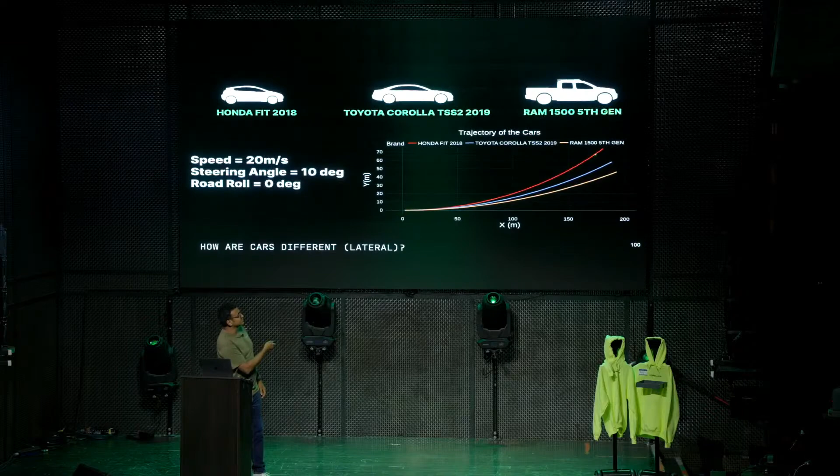So this is the trajectory that these cars would take. So this is the y versus x. So if you start at the same position, this is what the cars would do under the same instructions. So I guess right now it's clear that we need to really understand what exactly happens when you give instructions to cars. So how do we actually learn these things? We learn these things using something called the vehicle model. So to understand the vehicle model, let's look at some high school physics.

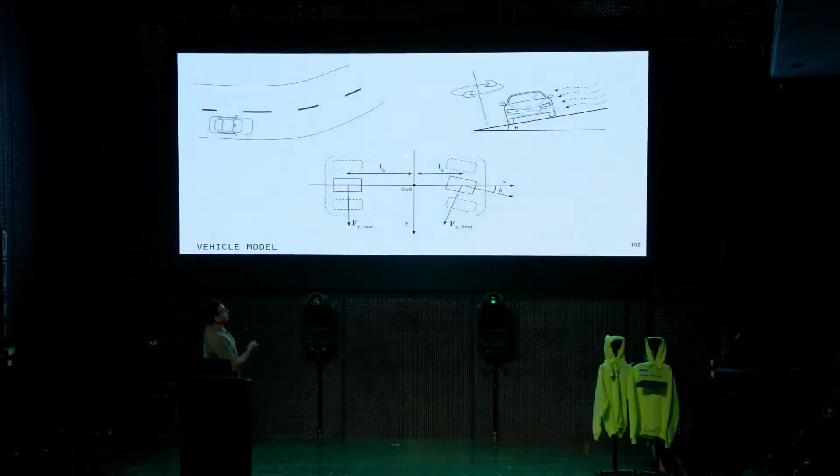So you're in a car and you're about to go into a turn. So this is the front view. So let's assume that the road is banked, and let's also assume there is some wind, because why not? So this is the top view of your car. So your four wheels and your front wheels are turning. I don't know how many of you are familiar with car dynamics. So this is something that we call a slip angle. The angle between your direction of motion and your heading is called the slip angle, and that determines a lot of the dynamics of your car.

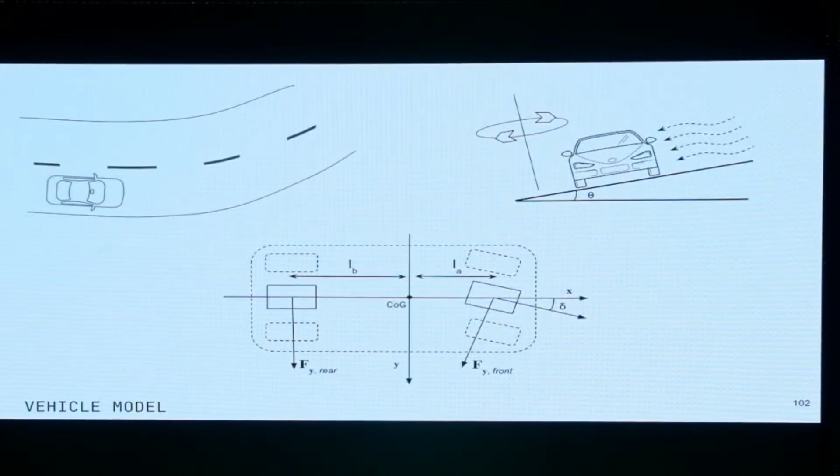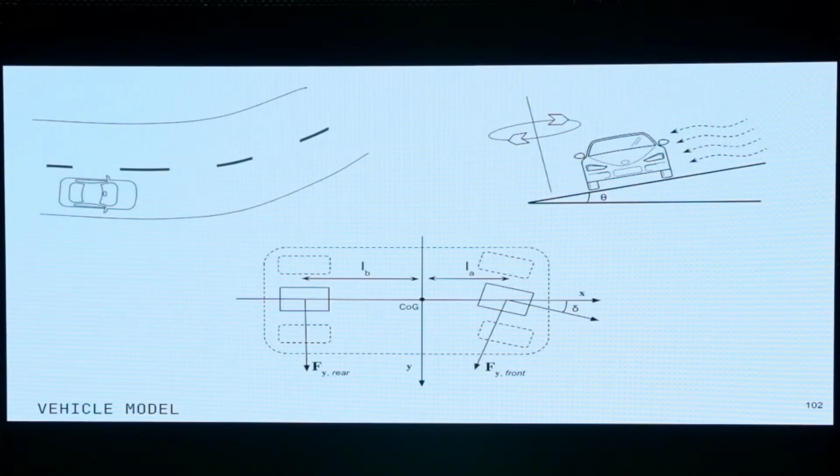So you can see that there are forces that act on the tires. So this is basically something called a bicycle model, which is you assume that your car is a bicycle, which is not a great assumption, but it really works. It's a simplified assumption of your car. And then this is where the center of gravity is, and then if you draw the free body diagram and the forces that act on this object, you end up with something like this.

So let's quickly go through this. It looks quite scary, but it's not. So what we have is the desired curvature that we get from the model and from the planner. We know the car has to do something, right, at some curvature, at some speed. So we have the yaw rate.

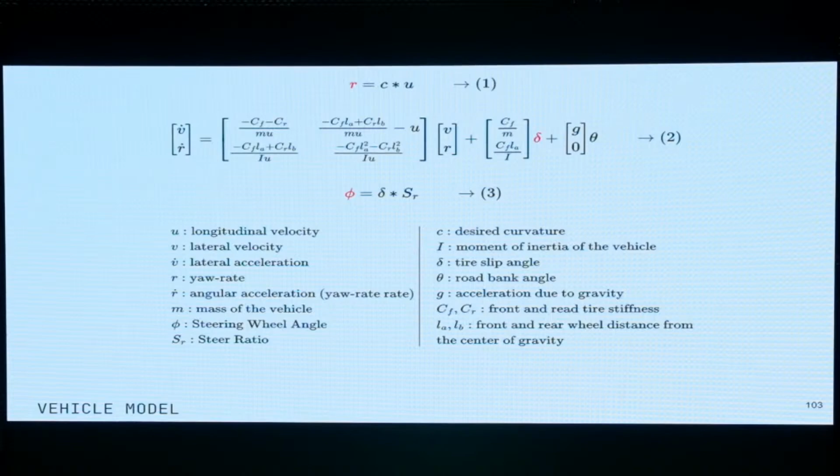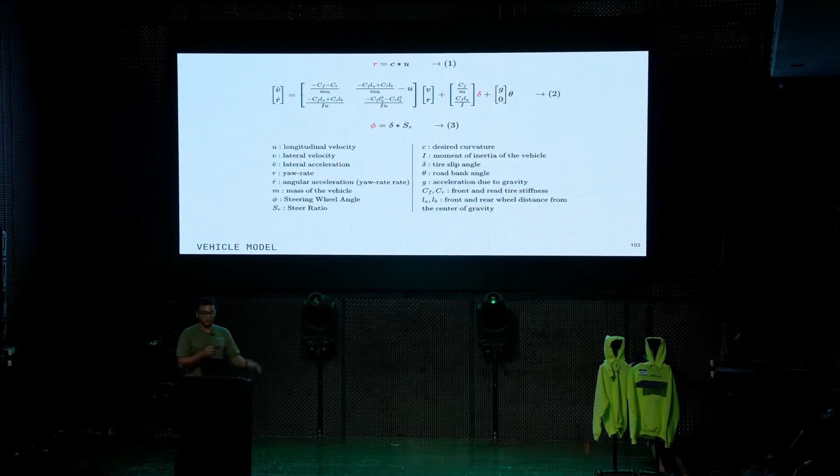If we make some very generous assumptions about cars and about our dynamics, we can find from the state space equation what the slip angle is to achieve this particular yaw rate. And when we know the slip angle, we can find the steering angle that you're required to turn to achieve the maneuver that you want to do. So this is called the vehicle model.

So we have a daemon in openpilot called paramsd, which learns all these parameters that we spoke about, and then it learns the dynamics of your particular car. So it learns things like the steer ratio, the tire stiffness, the road roll, the steering angle offsets, and all of these things. And it learns all of these things about your particular car.

So the interesting thing is the steering angle offsets. To go straight, you would assume you should keep your steering angle at 0 degrees. But that's not true. All cars have some offset. You have to keep your steering angle at like 2 degrees or minus 2 degrees or whatever. And that depends on your car and how long you've driven it and stuff like that. So this is also something that we learn live while you're driving.

A fun fact is that as a consequence of learning all this, we also know when you have a bad wheel alignment, which is if your wheels are aligned badly, and you want to go straight, you have to hold your wheel at like a 10-degree angle or something like that. A lot of people come on Discord and they're like, hey, I just installed openpilot. It drives fine, but when the wheel is straight, it tries to go right, and when it's going straight, the wheel is slightly to the right.

Is my device broken? And then we tell them what the problem is, and they come back a few days later saying, hey, about that, I went to a mechanic and he said my wheel alignments were wrong, and then they fixed it, and now my car drives perfectly. So this is something that, from your logs and from the tolerances that we know, we can tell you if your car has a bad wheel alignment.

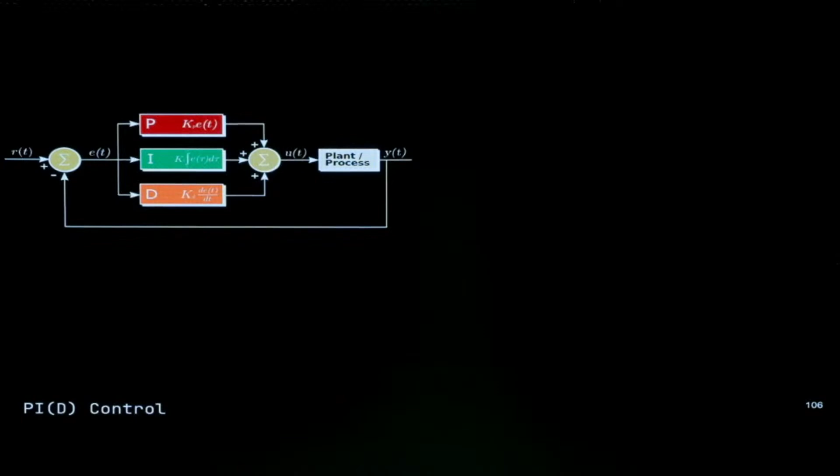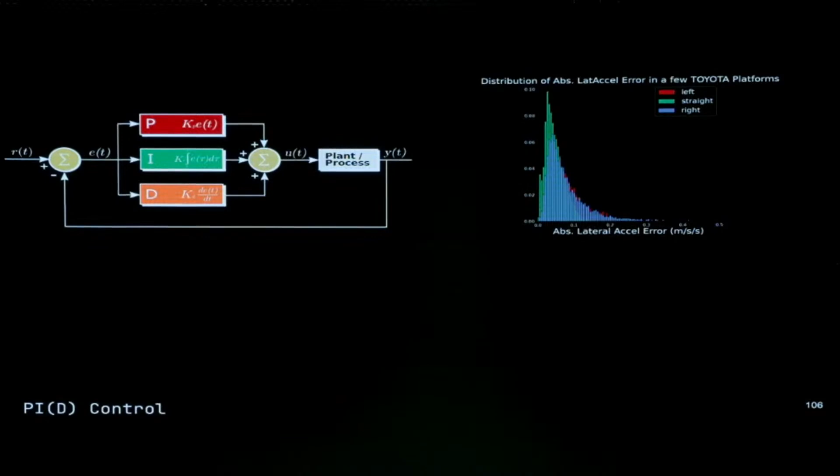So this is the distribution of the lateral acceleration error when you're doing these maneuvers. It's very important for us to understand how well the car is performing the maneuvers that you're asking it to do. And for that, we have a whole bunch of metrics. But one of the most important is absolute lateral acceleration error. So what do we mean by this?

We mean that when the instruction is to perform some maneuver with some lateral acceleration, and the car is doing something else, what's the difference between these two? And we have to drive this number down. So as you can see, the average of the distribution is much lower than in turns, which means that while going straight, it's pretty much error-free, but in turns, it's slightly worse. So this is a metric. Just remember this metric. We'll keep coming back to this again and again. So we had all of this, right?

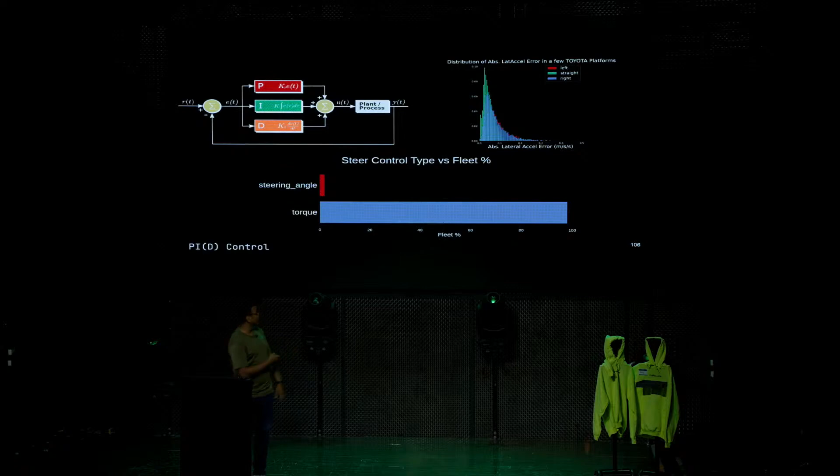But then we realized that in our fleet, the way we actually give instructions to cars, we don't actually give the steering angle. For overwhelmingly most of our cars, we give the torque. We give the steering torque that you have to apply to the car.

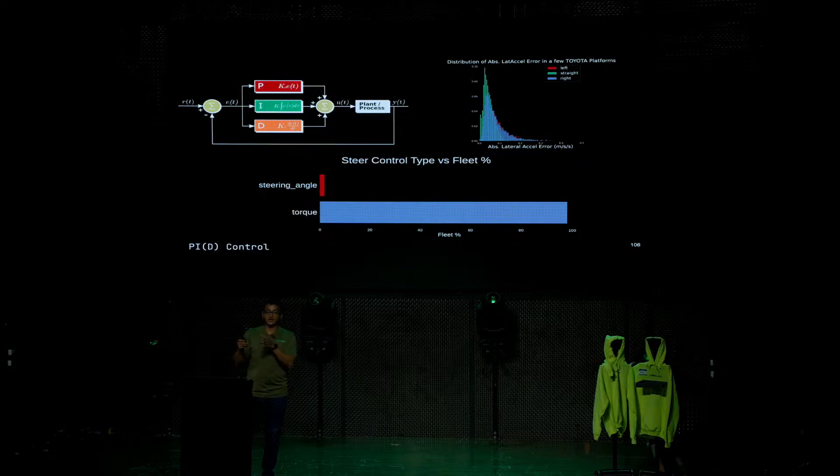So we realized, wait a minute, we were going about this whole roundabout way of: we have the curvature, we do all of these equations, we find the steering angle, then we close the loop on the steering angle, and then finally send torque. So we can just circumvent that and try to find torque. This was a whole effort called torque control, which we released in 0.8.15.

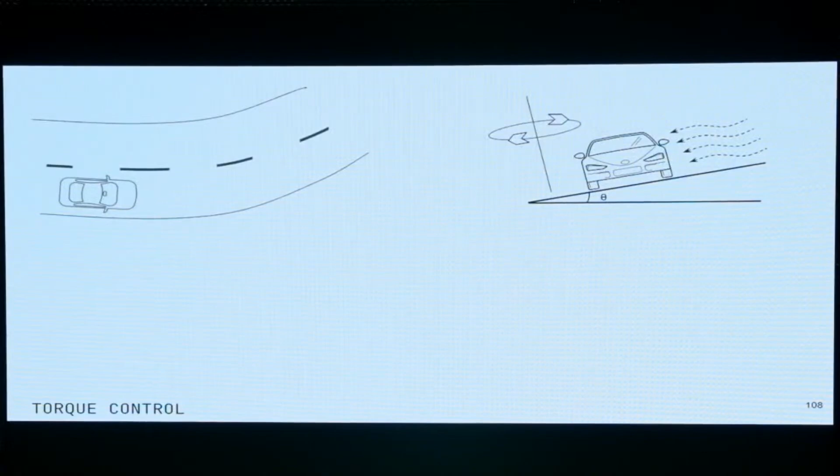So let's revisit the same maneuver that we did earlier, which is this car doing this turn at this angle. Now if you focus on the tire patch that is in contact with the road, this is the free body diagram of this tire patch. You can see these are the forces that develop on your tire during a turn. The wheel heading is this, the wheel is moving here. So this is the slip angle.

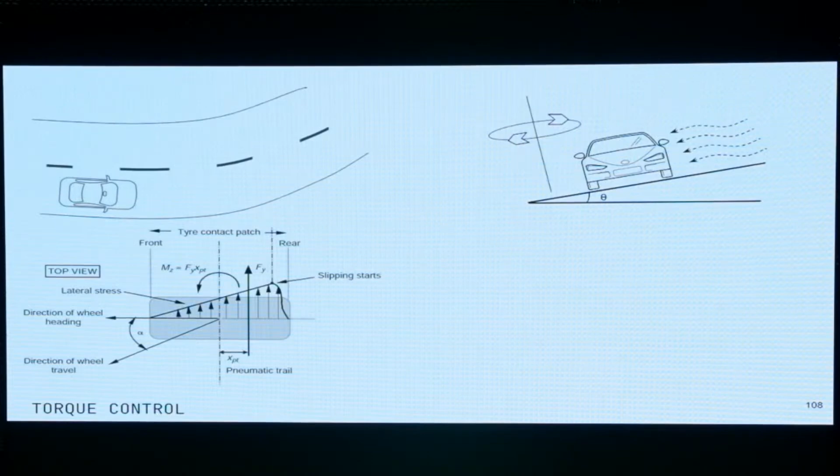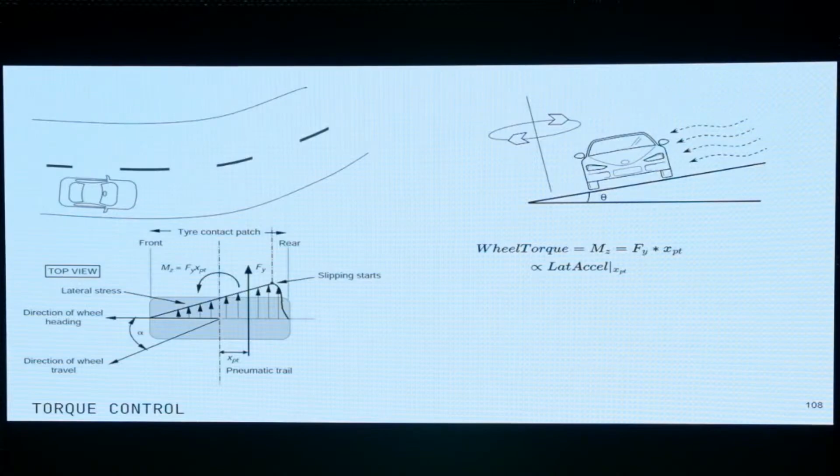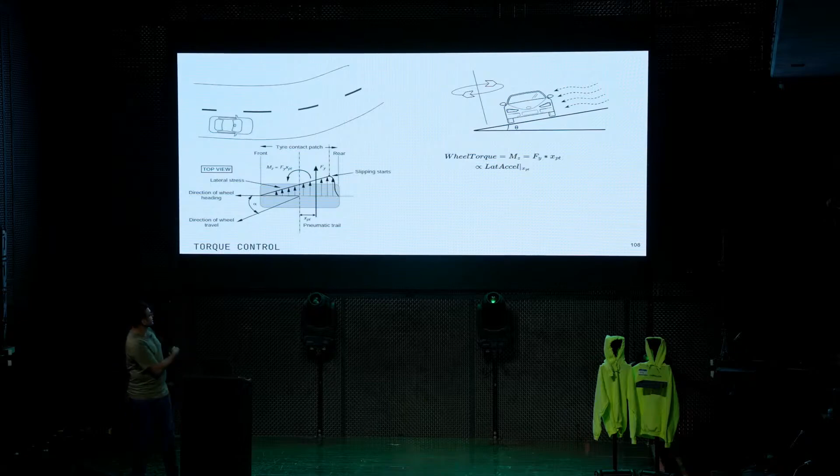So what this effectively says is that you have a resultant force that is X behind the center of the wheel. So basically, the wheel torque is this resultant force F times this pneumatic trail. And for a particular configuration of your vehicle, this is constant. So the key insight here was that the wheel torque is proportional to the lateral acceleration that you want to achieve, adjusting for gravity.

And from data, the second insight was that the wheel torque is directly proportional to the steering torque that you apply when you account for some friction. And friction is, when you're turning right and immediately want to turn left, there is a bit of friction in your steering column that you have to account for. So basically, we have a lateral acceleration that we want to achieve, and all we need to do is learn one proportionality factor to know what command to send to the car. This was great news. So we can find one value for each platform, and everything is good.

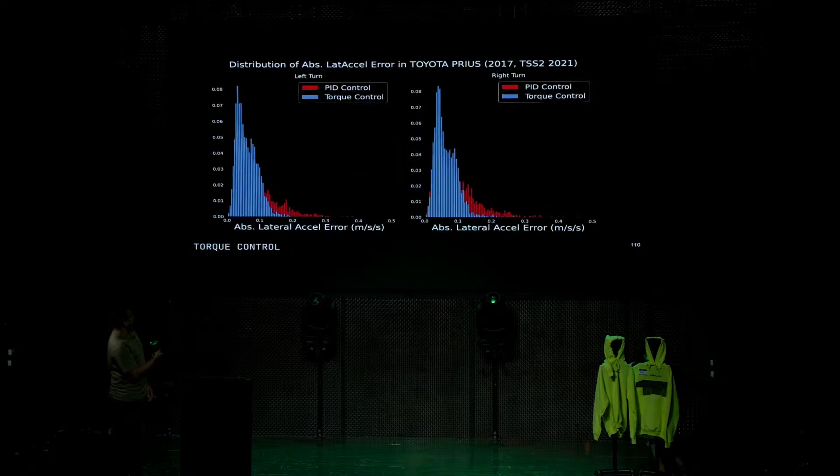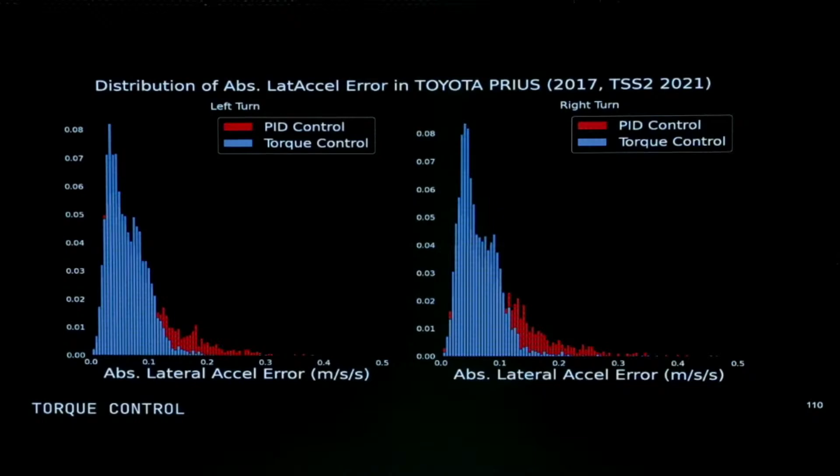So this was great news. And this is even better because the subtlety is that these higher errors lead to other things that are undesirable, like more ping-ponging, wandering in the lane, and other things like that, which we don't want. So this was great news, and everything looks good here. But then, okay, let's revisit the assumptions that we made.

The assumption was the pneumatic trail was constant for a given vertical load, which means for a given configuration of your car. But even among platforms, even among Toyota Priuses, each Toyota Prius is slightly different depending on how long you've used it, what you put in your car, and stuff like that. The contact tire patch is also quite different. It depends on the quality of your wheels, how much air you have in your wheels, and which road conditions you're driving on. And the steering column friction depends on the wear and tear of your car, etc.

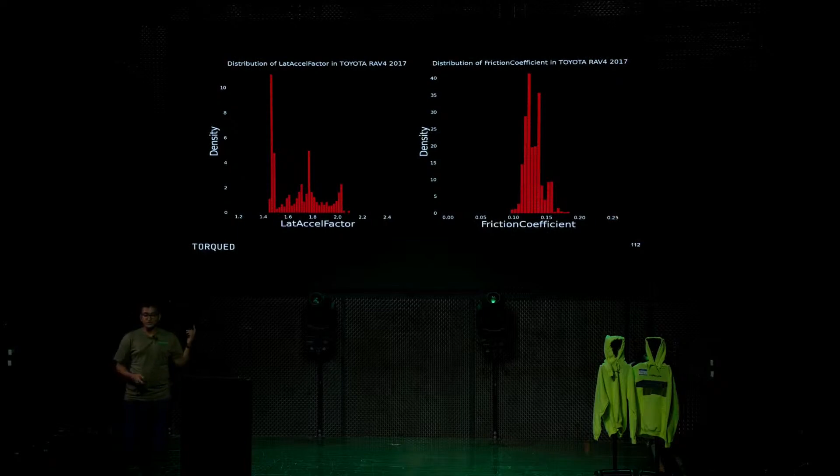This is also corroborated by the fact that when we do the same calculation to find the single factor for each platform on every car of that platform, we see a big distribution in the value that is learned. So this is the distribution of the factor that I spoke about. And you can see that even for one platform, there is a wide range of values. So we set the value somewhere here in between, and then it's great for people whose cars are here.

But then if people's cars are like here or here, it's not that great. So this was the motivation for us to go down this route of, we're not happy with platform averages. We want something tuned for your specific car, the car that you drive. So this inspired this effort called torqued, which is auto-tune.

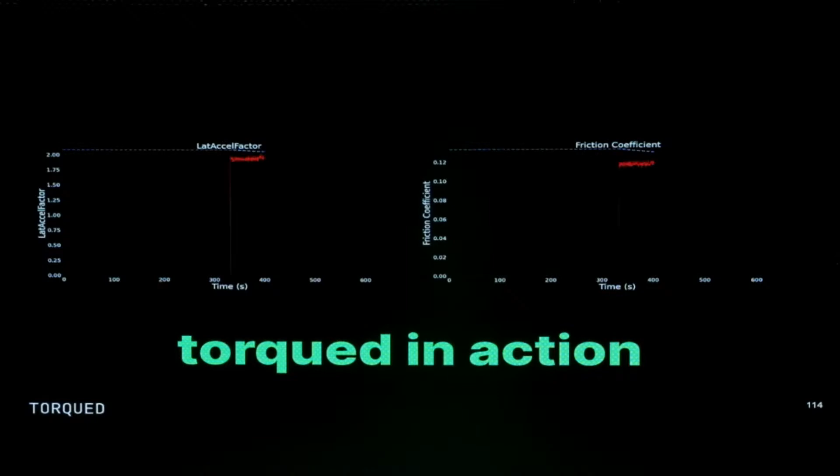So basically what it does is the same thing that we were doing offline on all the data from a particular platform like the RAV4. Now we do the same computation on your device while you're driving. So when you start driving, we collect data, and then once it meets certain conditions, we use the algorithm that we were doing offline in your car, and now we have one constant that is learned on your car.

And the great thing about it is that if you change your tires next week, or if you refill air, or if you put some stuff on top of your car to go somewhere, it learns live and it adapts live, and your performance becomes better as a result of that, which is great.

So going back to the same metric, this is for Toyota Highlanders. You can see that the torque control was red, which was already an improvement over the previous generation stuff. But torqued was an even better improvement over that. This means that if your platform has a bunch of versions that are different but somehow called the same platform, it's still fine, because we learn it for your particular car.

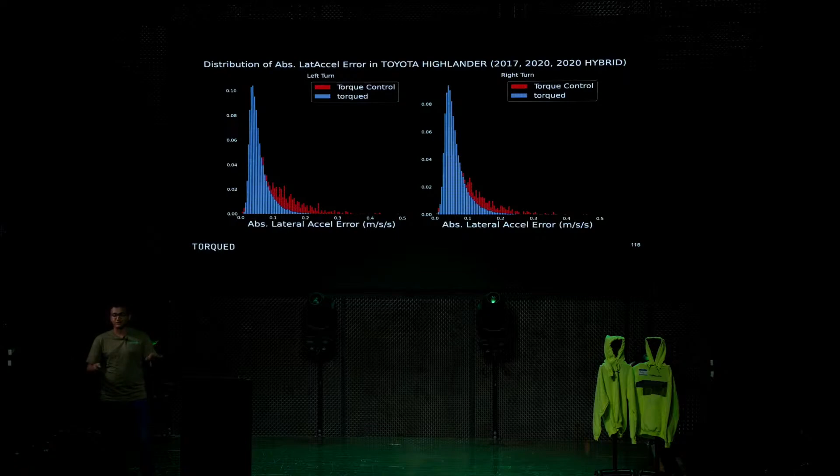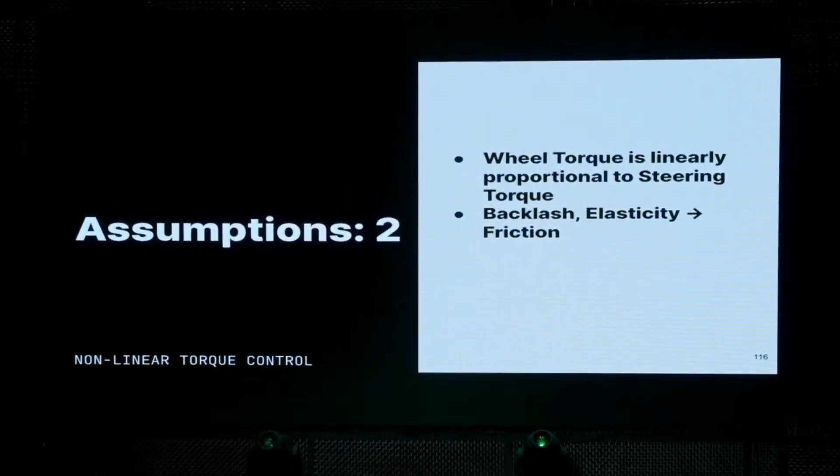So let's revisit the assumption again. We assume that the wheel torque is linearly proportional to the steering torque. So you apply some steering torque, the wheel torque is some factor of that, and then we forgot about it. But it turns out that's also not true. There are effects like backlash. When you're turning left and immediately have to turn right, there is some play in the steering column, a backlash that you have to overcome, and then your car starts turning right.

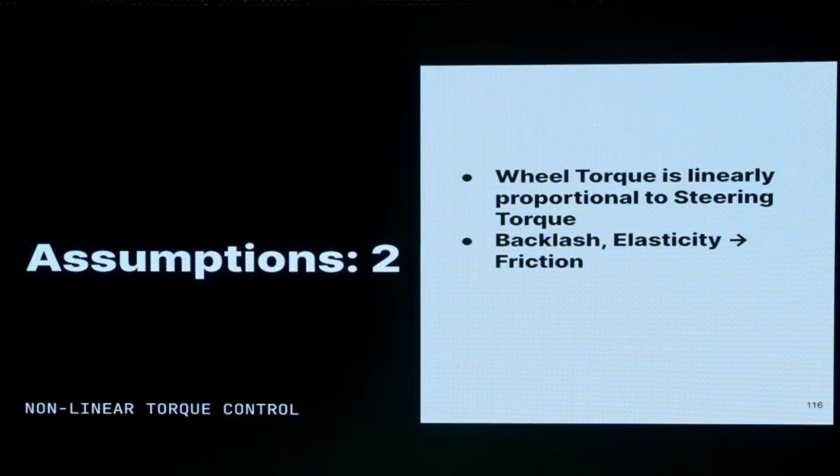While driving, we don't really realize this because humans are really good at driving. But when you're controlling the car through instructions, you realize there are all these effects at play that you have to account for. The other assumption was that we didn't care much about speed. We assumed that everything works the same at all speeds. But it turns out this is also not true. For some platforms, at different speeds, your car behaves very differently, and this also needs to be accounted for.

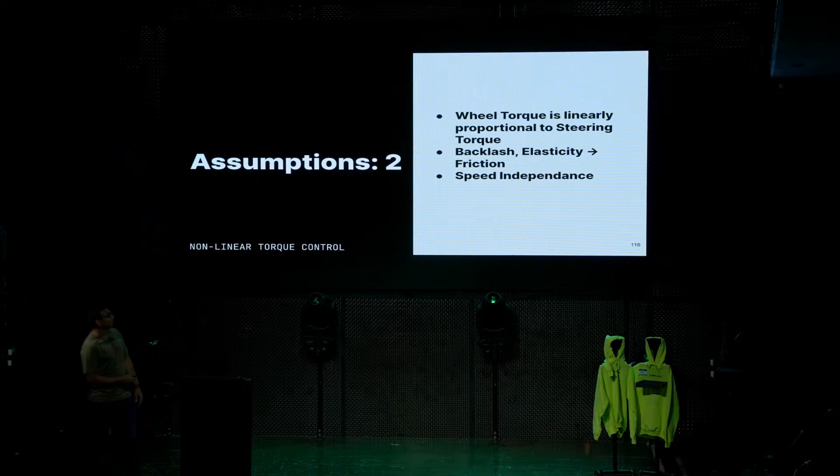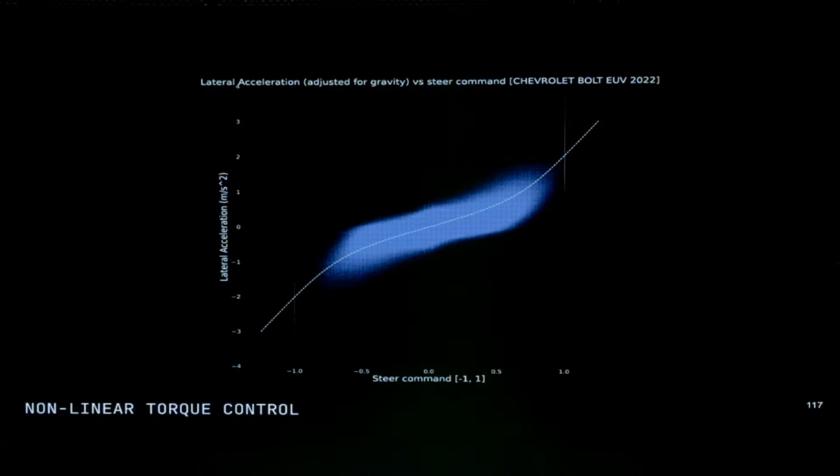So for example, if you take the same plot of the lateral acceleration that we desire versus the steering command that you input, this is for the Chevrolet Bolt. This looks pretty nonlinear to me. If you remember, in the RAV4 it was pretty linear, and in this it's not. So we had to do something about this, because if you apply the same algorithm that we used earlier, people have not nice experiences, especially at the extremes where it gets pretty nonlinear.

So we implemented a nonlinear algorithm where we have a nonlinear fit for the relationship between the lateral acceleration that you want to drive on and the command that you give. This was out in 0.9.3, and you can see the effect of this change. The nonlinear is better than the linear, which is also great.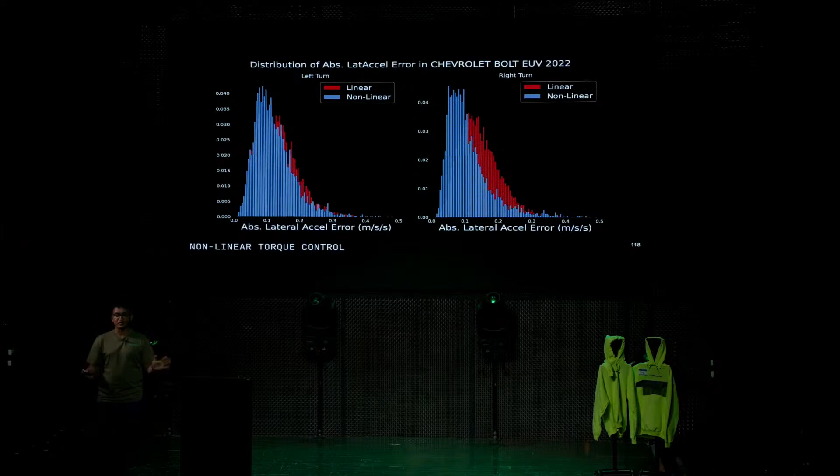And a fun fact is you can see that there is a difference in the left turn and the right turn. This is an idiosyncrasy of GMs. All these are super interesting things because we can see this at scale, and it's very hard to see this if you have one car. The errors are slightly higher for left turns than right turns, because in Chevrolets the left turn is slightly different compared to right turns. I don't know why, but it just is, and this also we need to account for. This was a great improvement for the people who have a Chevrolet Bolt.

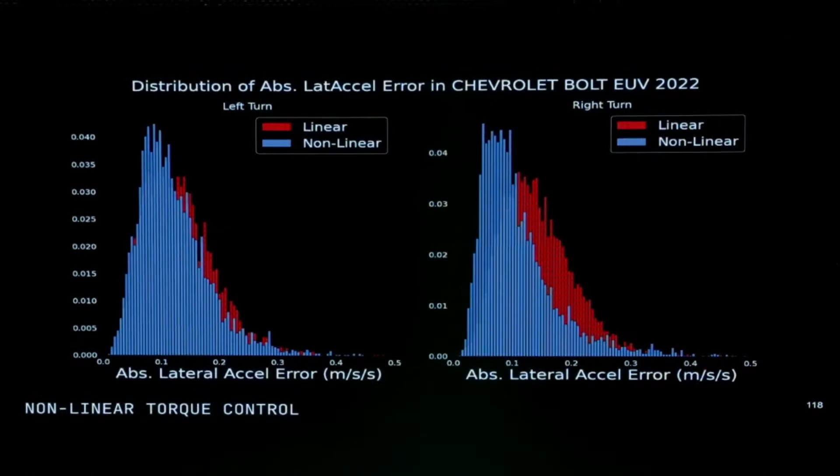So where do we go from this? We've seen that over time we keep improving this stuff.

We keep making sure that we move from fleet averages to platform averages and from platform stuff to each individual car. So a big effort for that was we released this dataset called commaSteeringControl. And this dataset is the largest dataset of its kind. So what it has is the actual command that you give to the car, which is the steer command, and all the other metadata like the lateral acceleration, the road roll, the velocity, a whole bunch of other stuff.

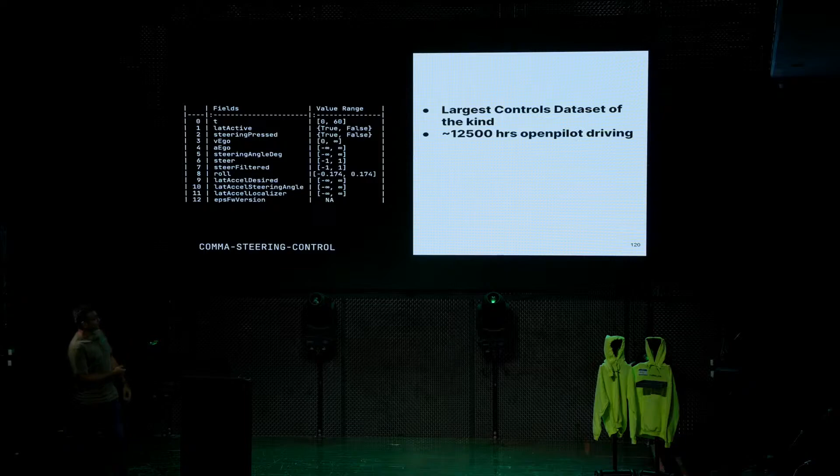Now this is excellent because this data is something that probably nobody else has. We are in a unique position to have so much data about so many different platforms across different driving conditions, different weather conditions and all of that stuff, and different usages. The cars have different wear and tear. So this is a fantastic dataset. This is 12,500 hours of openpilot driving, 10 plus car models and 10 plus brands. And we have plans to add more data to this. We have plans to add non-openpilot driving.

So when I spoke earlier about the vehicle model, that vehicle model is valid for small slip angles, which I mean by small steering on a highway. But if you want to do a rapid 180-degree turn, the vehicle model completely breaks down. You can't use the same vehicle model for that. In openpilot, we are not there yet to do 180-degree turns, but we will be. And at that time, we will have to dive deeper into the data and figure out how we can improve our algorithms to cater to those maneuvers. So this dataset has all of this information.

So some people on Discord have already started using this. They have some obscure brand that not many openpilot users use. So now they have access to a whole lot of data that they can dive into, and they can see if they can improve the performance of their own particular car, which is great.

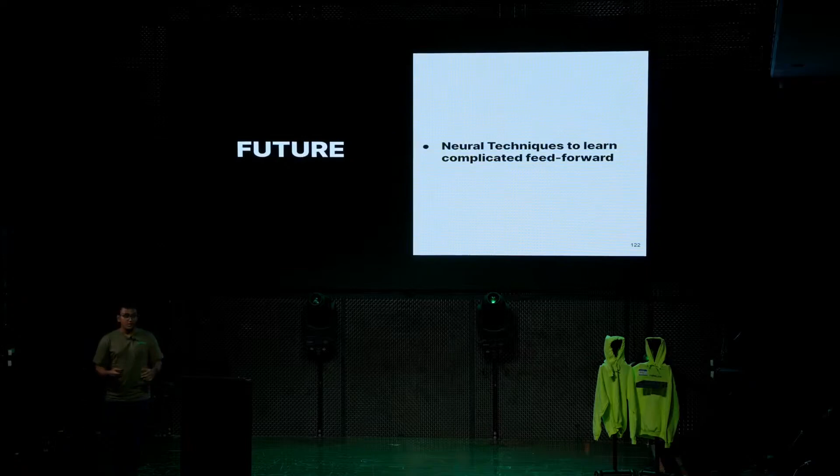So what is the future for tuning and controls, right? We want to use more neural techniques to learn the complicated feed-forward functions. So you saw we started with a simple linear model, and then we went to a linear model on device, and then we went to a nonlinear one, but still we sort of reverse engineer the function and then we learn it. But we want to move to a totally learned function.

So what this means is, irrespective of what the input and output is in your car, we should be able to learn the response of your car to the instructions that we give to the car at all ranges of speeds. There are some cars that do automatic roll compensation in the car and all of this stuff. We want to be able to learn all of this stuff live in your particular car.

Not sure what happened there. Yeah, so I mean, I was about to end. So that's another plan that we have.

The final goal is to move to a target audience of one. So basically the target audience of you, and everything is tuned to your car and it drives perfectly. The output of the model and the planner is perfectly implemented on your car, and then the final goal is me not getting any more messages on Discord saying, "Can you tune my car?"

So that's it. I just had a couple of call-outs. So do check out this dataset. Do come on the Discord channel, and we keep discussing a lot on the Discord channel. So hopefully you can improve your own car much better, and then we can upstream it. That would be great.